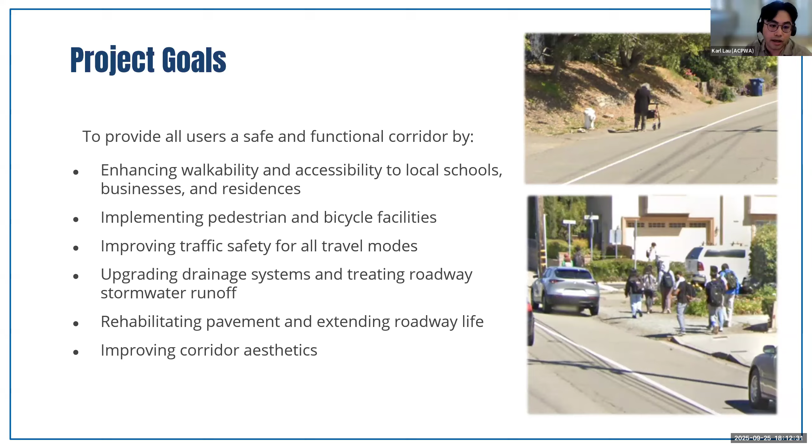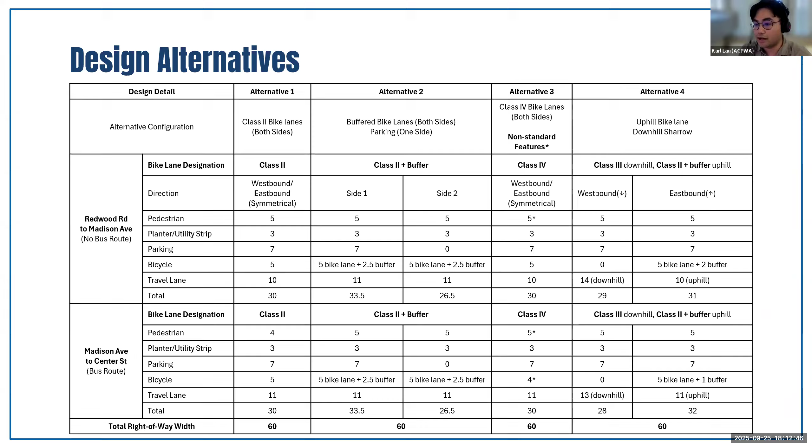Alternative one is a Class 2 bike lane on both sides. From Redwood Road to Madison, this design provides a 5-foot wide sidewalk on both sides of the street for pedestrian access with a 3-foot wide utility and planter strip. It maintains a 7-foot wide parking lane on both sides, includes a Class 2 5-foot wide bike lane on both sides of the roadway, and a 10-foot wide travel lane. From Madison to Center, the design is similar, except it maintains a 4-foot wide sidewalk on both sides with a 3-foot wide utility and planter strip and features an 11-foot wide travel lane for public transportation instead.

This alternative helps organize the space more clearly for different types of road users. It's easy to understand where you belong and how to move. It's designed to accommodate a wide range of user comfort levels. The layout offers a more symmetrical design compared to other alternatives, and by providing narrower travel lanes, it influences slower driving behavior. It's also built to work with the existing condition of the corridor, as we can see today.

Alternative 2 is a buffered bike lane on both sides with parking removed on one side. From Redwood Road to Center within the county right-of-way limits, this design will provide a 5-foot wide sidewalk on both sides of the street with a 3-foot wide utility and planter strip. It maintains a 7-foot wide parking lane, but only on one side of the street. It includes a Class 2 5-foot wide bike lane with a 2.5-foot wide buffer and an 11-foot wide travel lane that's consistent across the whole corridor.

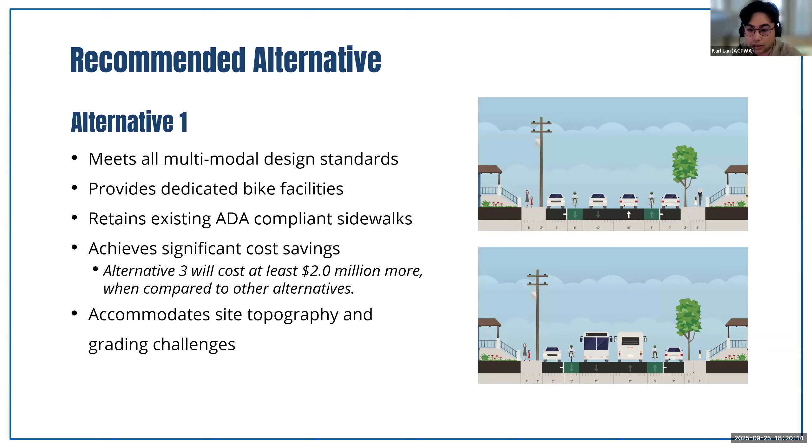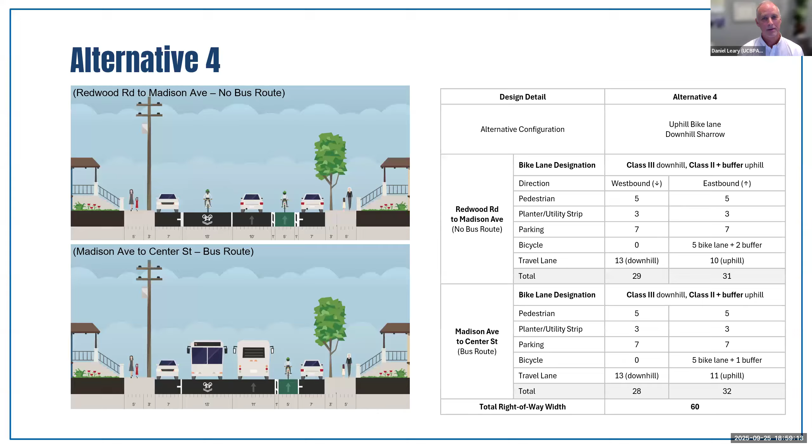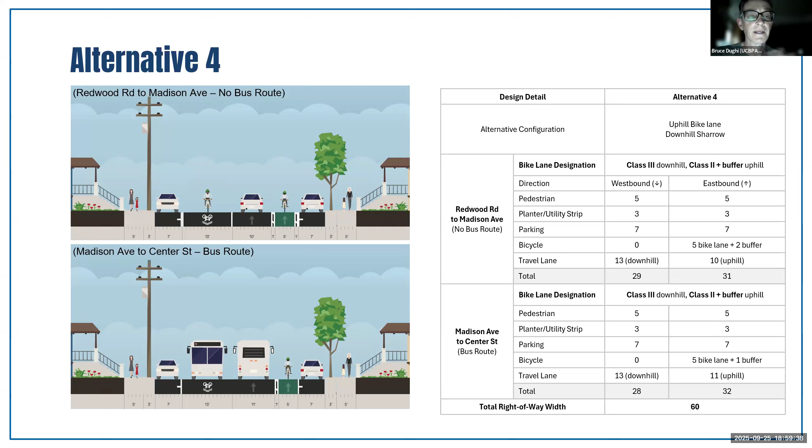Yeah, I want to say on alternative 3, I want to challenge Dan's idea. I get that it's going to take longer to build, but we already have - we've been already building those, right? We build them on Mission and on Llewellyn. So this idea that we can't do it is not correct.

And that is definitely the solution that the students are most likely to use. So what we really want to go for is the solution that's going to get the maximum number of people out of cars. I also want to make a comment about balance - this idea of balance is like a false equivalency thing. We need to have all these parked cars - for 100 years things have been totally out of balance, and we have not been accommodating cyclists. And now the balance is to maintain everything for the car. So that's not balance - balancing is like a compromise or something.

And this idea that the community is against removing parking is also incorrect. The only people that are against removing parking are those who are going to lose it. There are a few others who also support them, but in general removing parking is better for the people who are using the road.

The majority of road users don't live on the road, especially on a road like Heyer, which is a very busy road. So if we want to talk about balance, you need to talk about the road users who don't live on the road. There is intermittent parking here - it's not full parking all the way down, so there's a possibility to remove some parking. I get it's politically unpopular, but we will never make any strides in getting people out of their cars, which is the goal, if we continue along these lines of maintaining parking. It's just never going to work. Thanks.

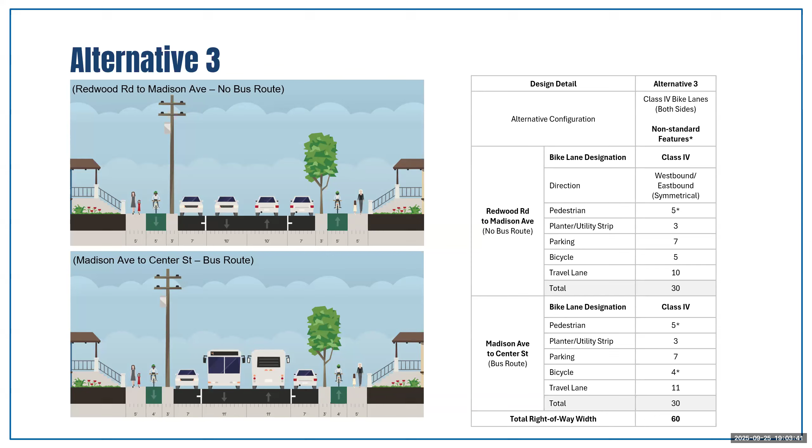Any more comments from the committee before I move on to public comment? I just want to say, I think that's right. The idea of building something quickly, if we don't have the ability to change it in the future, then it doesn't really matter if you build it quickly. So it's really better to build it correctly.

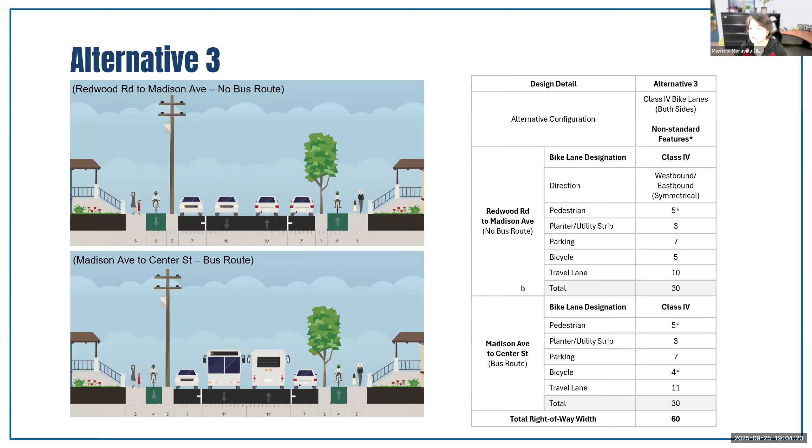Thank you, and now we will move on to public comment. I believe Stephen Dunbar had his hand up first. Stephen Dunbar, are you ready to speak? Hi, can you hear me? Yes, you have 3 minutes.

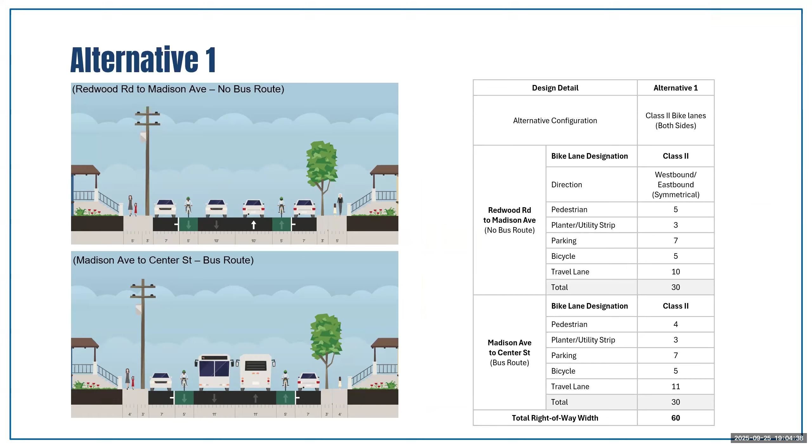Excellent. All right. Hello BPAC and staff. I am not a resident of the Hayward area anymore, but I used to be. I speak here as a board member for Bike East Bay only. I'm here to give some advice. Bike East Bay staff regrets they're unable to attend tonight. I am not going to comment on alternative 2, as I feel that's inappropriate for my role here.

I wrote this comment on the corner of Foothill and Heyer. I was at Top Tie up until about 3 minutes ago, and now I'm at the BART station. I just rode through Hayward to try their new bike lanes today, then came up here and rode back and forth on Heyer a few times. Having the cost information and where the sidewalk is to be replaced versus added would have helped me make better comments. It was a little unclear to me, so hearing what you all talked about over the last few minutes, I made some small edits.

A few weeks ago, I sent an email to staff recommending they try the uphill bike lane, which is alternative 4, and downhill sharrows. Your current design shows 2 minimum width 5-foot bike lanes next to minimum width travel lanes that you've already talked about. There's a pretty significant slope here, as you've all mentioned. Even on my lightweight turf bike today, I was below 10 miles an hour on a lot of Heyer, and cars were traveling at 35 miles an hour, some at 39 on the feedback sign, and some even faster where the feedback sign stops telling you how fast they're going.

I do stand by my recommendation that alternative 4 is clearly superior to alternative 1. However, I did ride down Mission Boulevard on the way here, to the new northern section near Rose Street, which has a non-standard 4-foot bike lane against the sidewalk, as alternative 3 does. Even in that high frequency commercial corridor, I think it works as well as anyone can hope for given the constraints. With similar driveway distances here as Mission, but with a lot more frequency of use, I think alternative 3 would work here, even with the grades. I know this involves staff doing a lot more work and cost, but you're already spending millions on these sidewalks. The class 4 lanes would also improve pedestrian crossing distances.

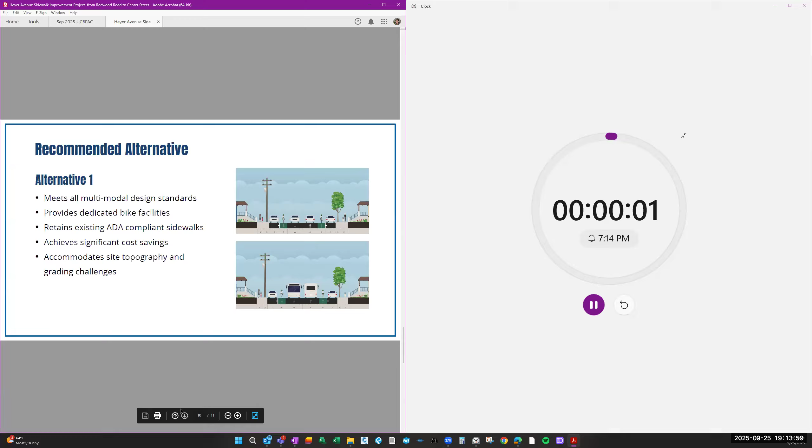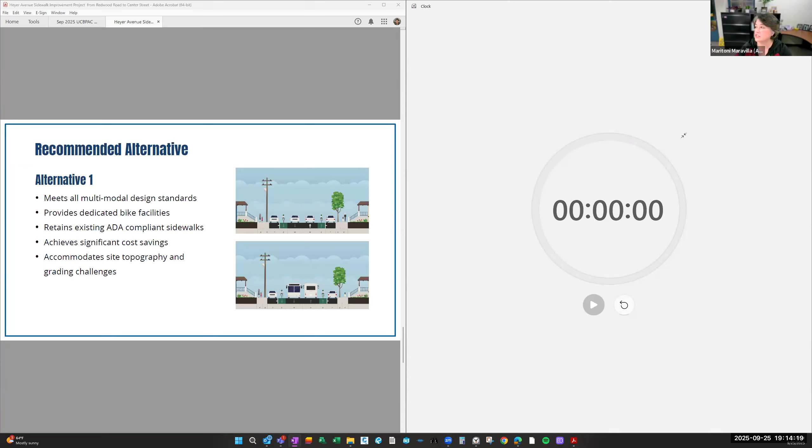Next on our agenda, I'll give you a quick update on the pedestrian bicycle trail master plan. Just to let you know, the consultant selection process is complete. The successful consulting firm is being notified this week, and we hope to have a contract executed before Thanksgiving and issue a notice to proceed before the holidays. Once we have a kickoff meeting and a milestone schedule, it will be shared with this group, but we are aiming for adoption prior to the summer 2027 board recess.

With that, are there any questions or comments from the committee? Sorry, when was the timing? So they're going to be notified this week, and then it'll start at when? The letter went out today.

We'll negotiate the contract with them and hopefully go to the board for execution of the contract, either end of October or beginning of November, but hopefully before Thanksgiving. Then we can issue a notice to proceed before the holidays and maybe have a kickoff meeting with the consultant and get a milestone schedule for the update. But our goal is to have it adopted before the summer 2027 board recess. That schedule takes into account that there will be a public review period and that we will most likely have to take it to the different municipal advisory councils.